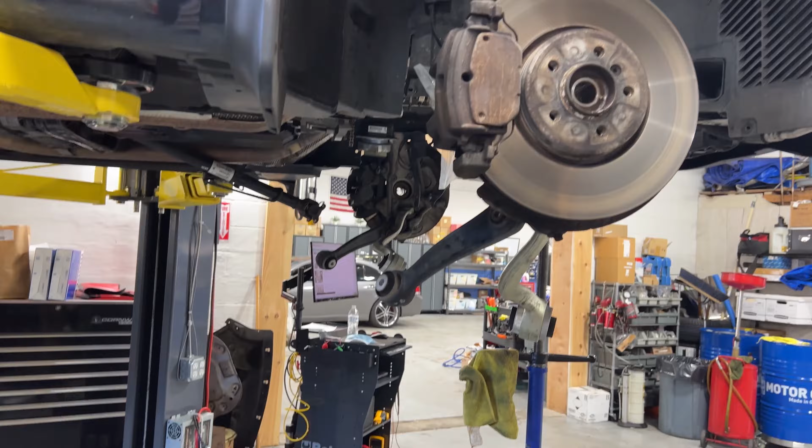I'm working on a 2016 BMW X5 with an N63 engine. As you can see, it's a 5.0 X drive, which means it's all-wheel drive. The problem with this one is an oil leak through the oil pan, the upper oil pan.

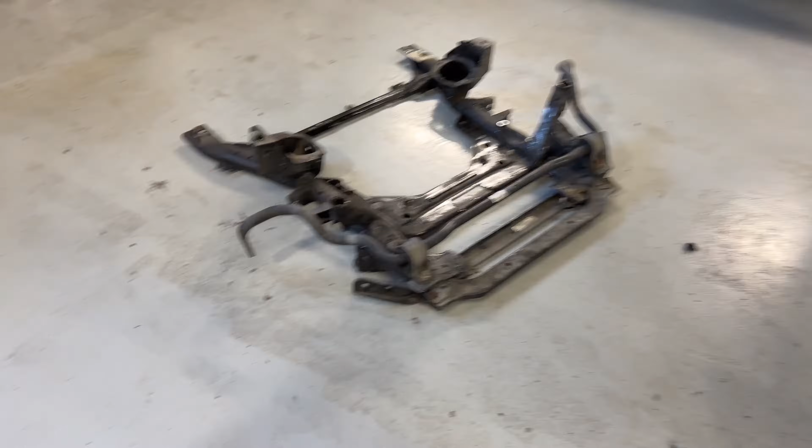For this one, you need to drop the entire subframe, even though the repair information... let me show you. I got the subframe there, this is the upper, and that small one is the lower. The axles have to be removed, the differential has to be removed, and I got them organized in here.

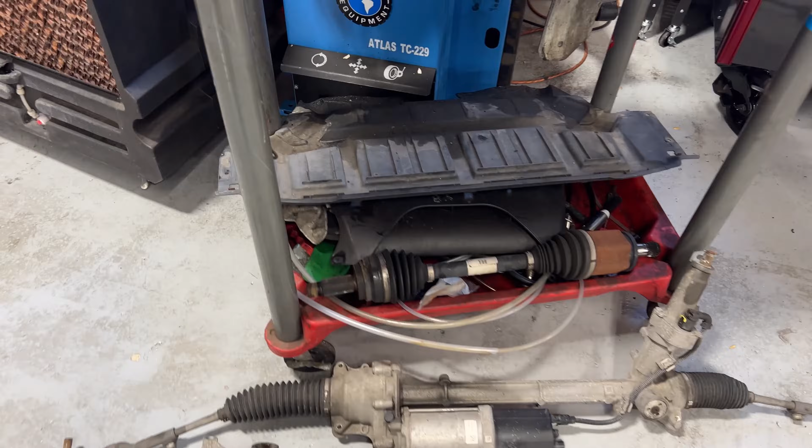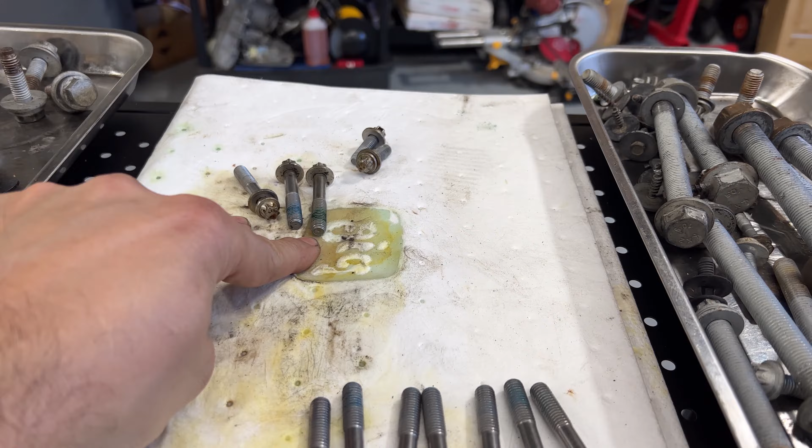I'm trying to get as organized as possible. Don't mix the bolts. These are some of the externals, and these are the internals on the oil pan and the upper oil pan. I try to keep it like that.

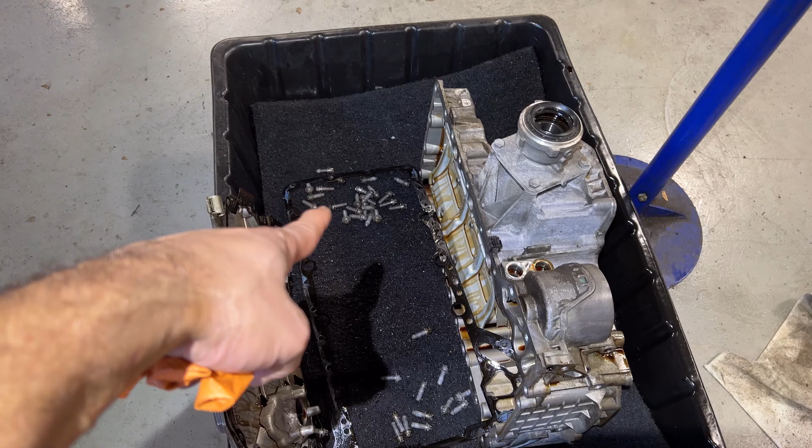I also have some of the bolts on the upper oil pan. These short ones are external, and those are for the small oil pan. They're supposed to be replaced, so I have all that new, but I always like to not mix it because I want to make sure I put all the lengths as they go.

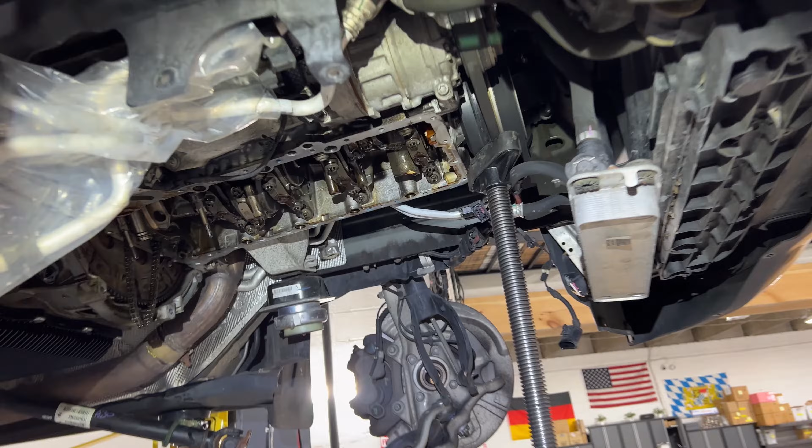Let me show you here. I already got everything removed. You need to remove and replace these O-rings. There's two little feeds for the oil pump. That's where the oil pump goes.

Let me show you the oil pump. It's right here. The oil pump has a gear which is down in here, that's the oil pump gear. It's pretty easy, you just need a T45 and a 13 millimeter to get the oil pump.

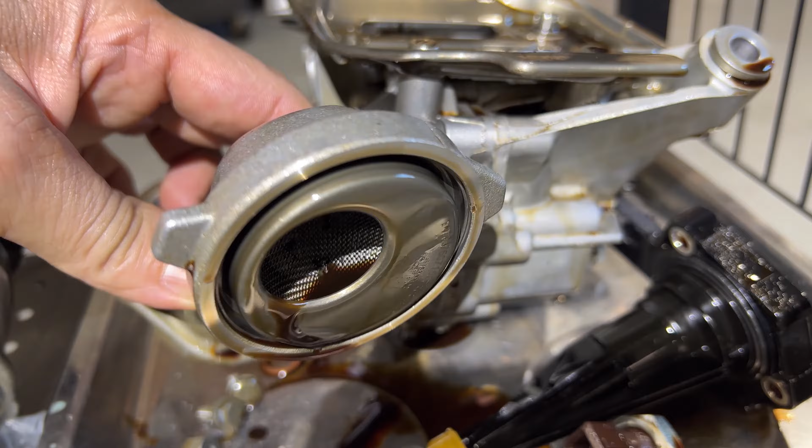This is the one that has T30. That's just the feed for the oil pump, and it has the normal filter in there with some little debris, which I'll clean before installation.

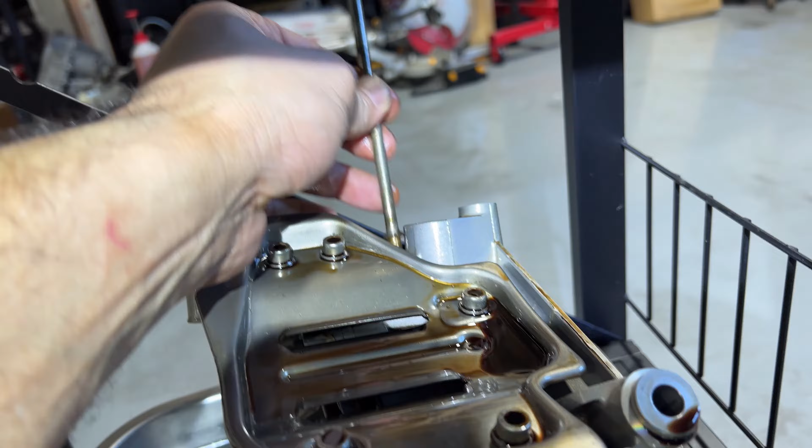You need to replace that ring on the back, and this is the other tube I was referring to. It has a ring inside on the top and on the bottom. I just like to leave stuff in there before I need to reinstall.

This is the oil quality sensor. The motor mount on the passenger side has to be removed in order to get the pins and everything with more room. As far as the repair information, it doesn't show or ask to remove the subframe, and I'm going to show you that.

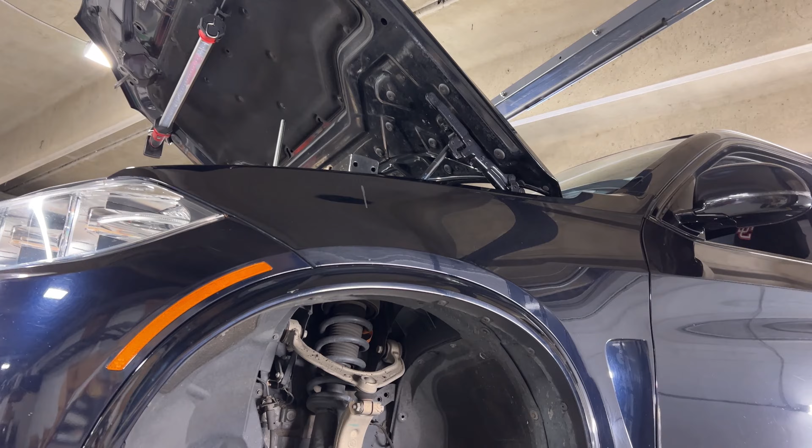I'm gonna tell you, if you can, like I did, put... it's gonna be very hard to see, but I got the Schumacher engine frame to hold the engine from the top. I put a chain on the back and in the front, and this lift is also helping that upper bracket to not be holding all the way while I work in here. So if anything fails, at least I got a chance to run away and not kill myself, right?

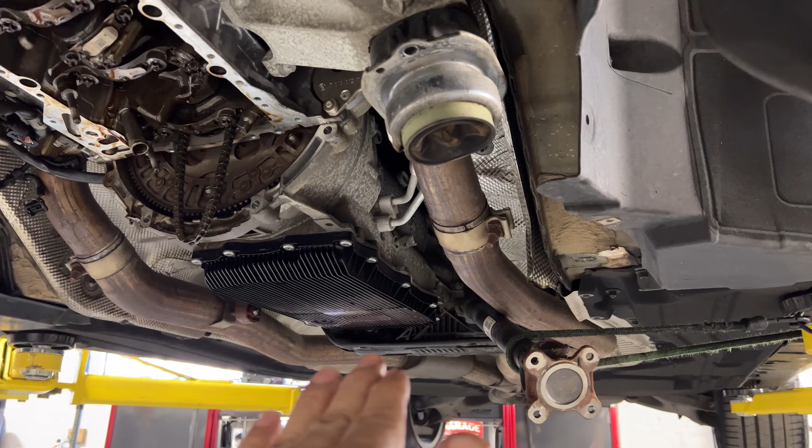The transmission is held by the transmission mount, so that's not a problem. All you need to remove is also the shaft, and then 4 bolts in here, which are E14. Those you don't need to replace, but the rest, which are E12s, they need to be completely refreshed.

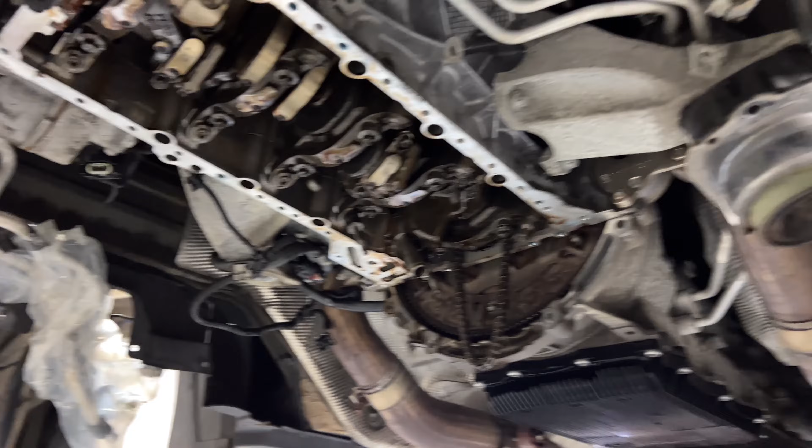Yeah, it's pretty simple. I have also all the sequence. You need to remove the oil filter because there are two bolts right inside where the filter is. And then there are ones through the oil filter, or next to it, between the transmission and the pan, with plastic plugs to remove.

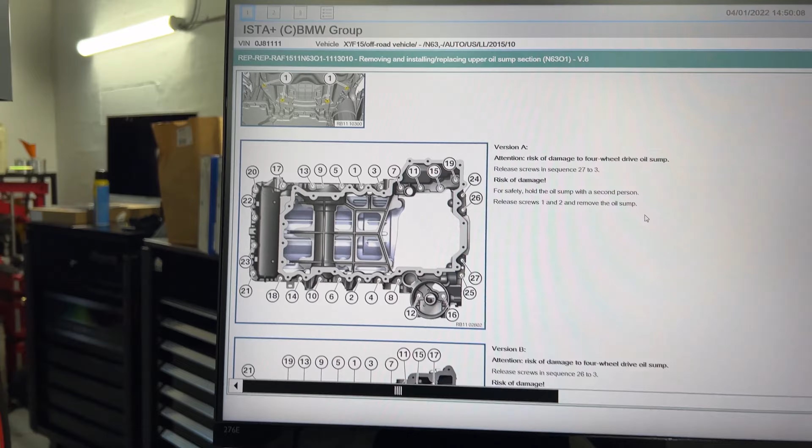That is pretty simple. That is the sequence for torque and torque specifications. I have everything in here. That's what I love about working with original information, because there are no mistakes.

So yeah, these are the bolts 12 and 16 that I was referring to, and the ones behind, between the transmission and the engine, that you cannot see because it's just a hole through the bell housing, and it's from 24 to 27.

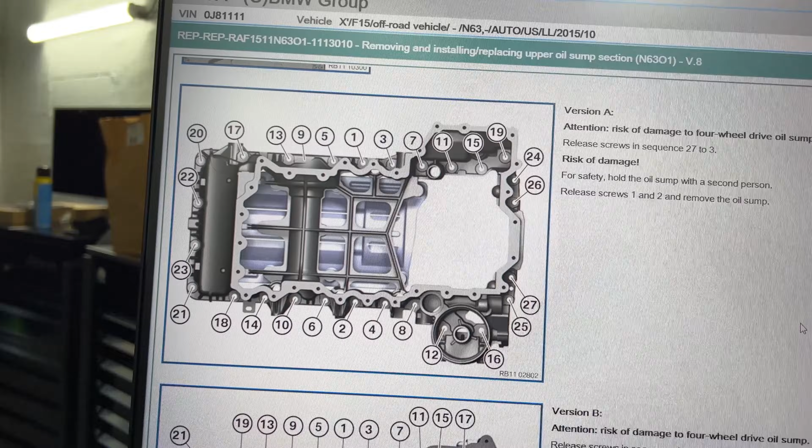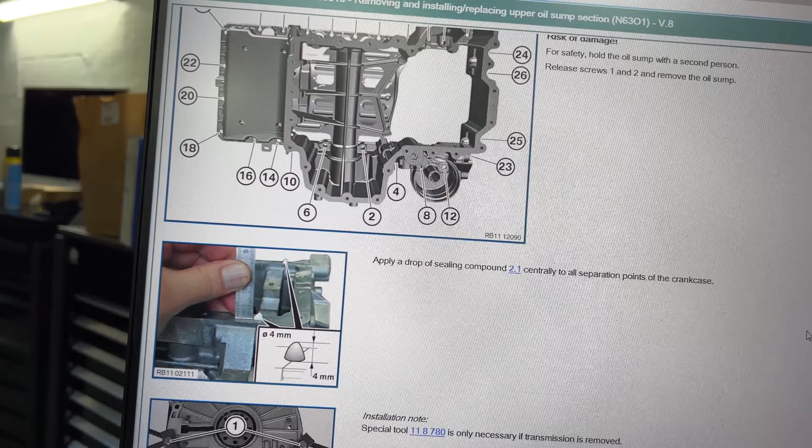It's pretty easy, and then the same thing tells you how much silicone you need to put in here. A 4 millimeter bead in between is very important, and that's what I think. This is also shown with the transmission removed. If you're not removing the transmission, you don't have to put that, but that's what they recommend.

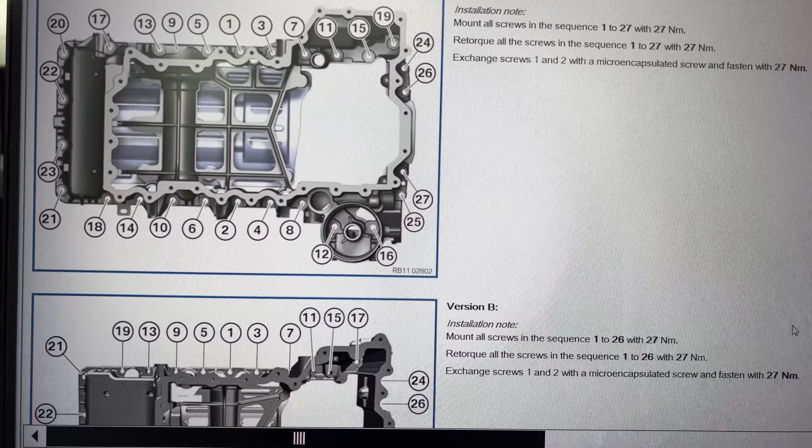I'm just going to leave this in here so you guys can see all the information as well. Again, this is the sequence, 1 to 27, to 27 newton meters, and so on, all the torque specifications, so you guys can have it as well. Again, this is an N63 engine, N63B, N63, they'll have the same layout.

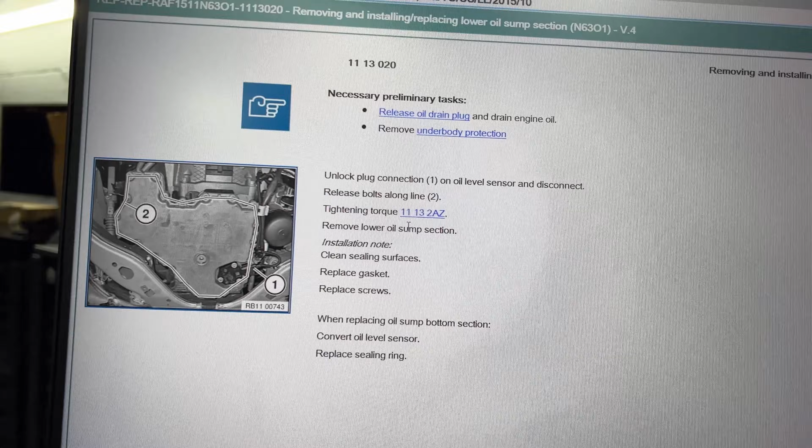And then just assemble the engine, pretty basic. Let me see if I have the torque spec for the lower oil pan section. Yep. So I can put that in here, and the tightening torque is right here. So let me just go back 1 second. So it should be 2AZ, 1113 2AZ. So 2AZ, you got 2.

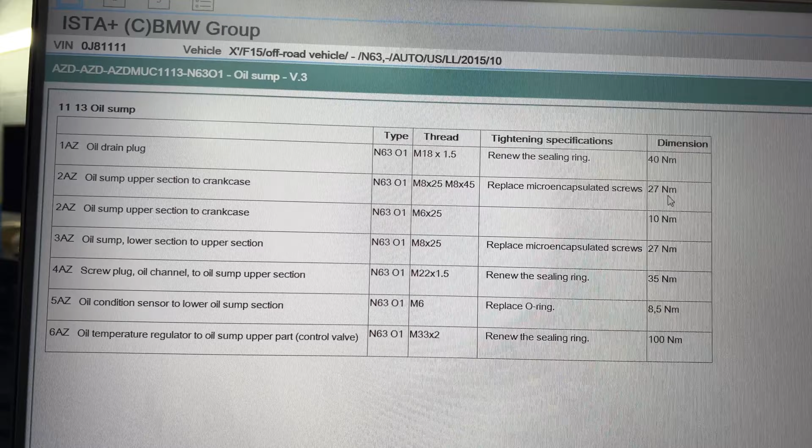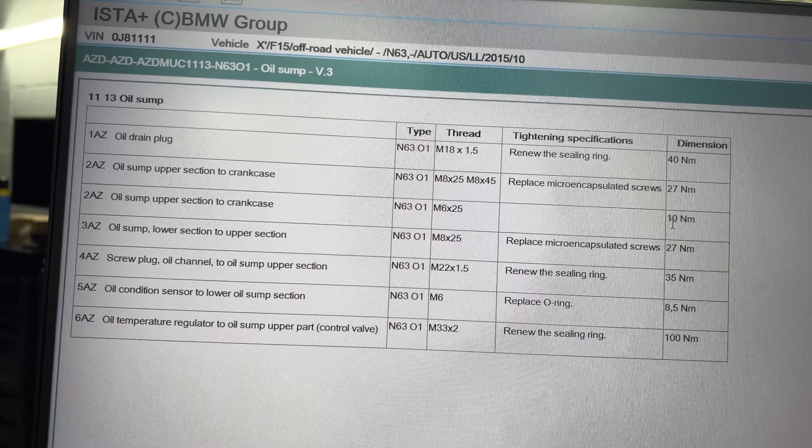And then that's the difference in between the threads. One, if it's an 8 by 25, or the 8 by 45, is 27 newton meters. If it's a 6 by 25, it's only 10 newton meters. Pretty simple. Again, you got the information. It's nothing really important or that hard to do. It's just a lot of work. You need to remove everything, preload the suspension again when you install everything back, and then you're good.

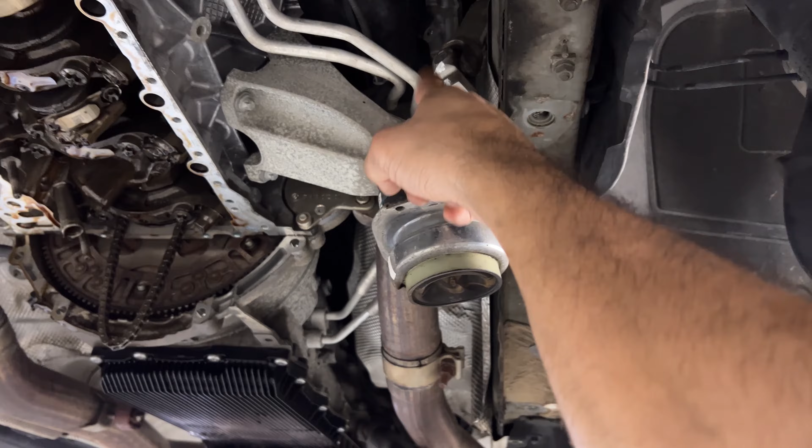As far as the power steering, I just unplug the cables that go to the front right here, and then just remove the clips, and then just hold the wires in here, and then with an E12 remove the one that comes from the steering. I always put a wire mark in here. The steering is being held by one of those I use for the alignment. I forgot the name of that. But yeah, it's pretty easy, just to make sure it goes into the same position. Otherwise, you need to remove and install back in to make sure the steering is straight.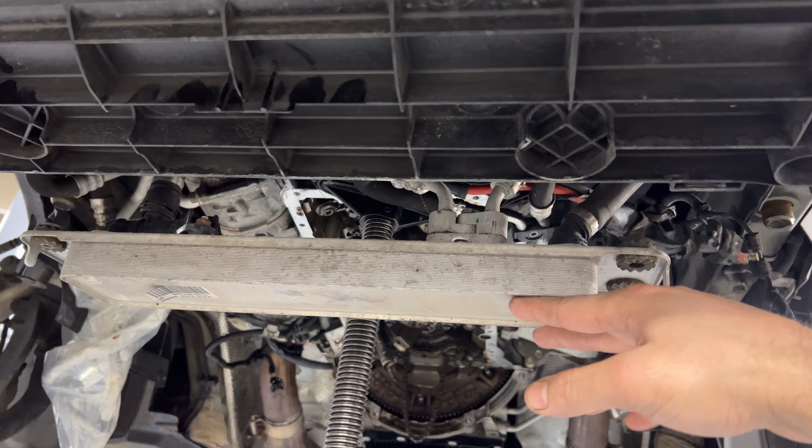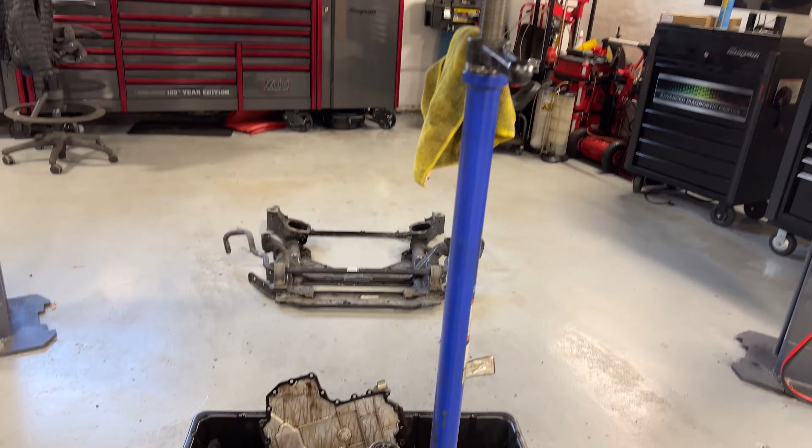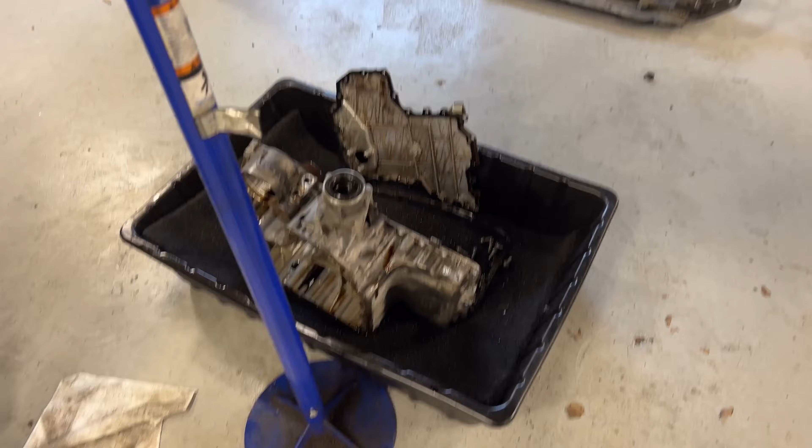This is a pretty straightforward repair. Again, it's just a lot of work. This is just an oil cooler. This is held by two 10s. Pretty simple. Let me just show you around. And that's what I've been working on today. So yeah, I try to keep my workspace pretty clean. I bought that tray so I can put heavier stuff and bigger stuff, and all the dripping stays there. I always keep a rag on the floor that I can move around with my feet and pick up any small drips that it might not catch.

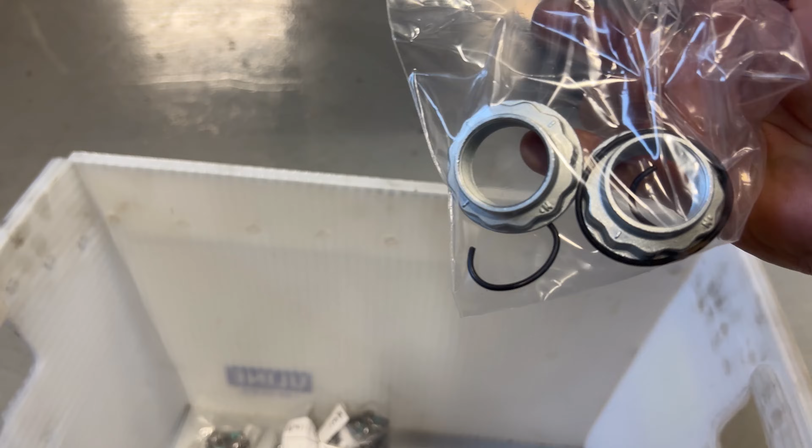I'm going to start to clean everything back and reinstall with new gaskets. I got everything original from the dealer. Let me just show you that too. This should be the part number for the lower. This is the upper gasket, and that is the part number for that. You need to refresh the two nuts for the axles and the clips, and the O-ring for the differential, which is right there. And again, all the little bolts that I need to replace. As you can see, everything in here, that is for the oil pump. And yes, everything is in here.